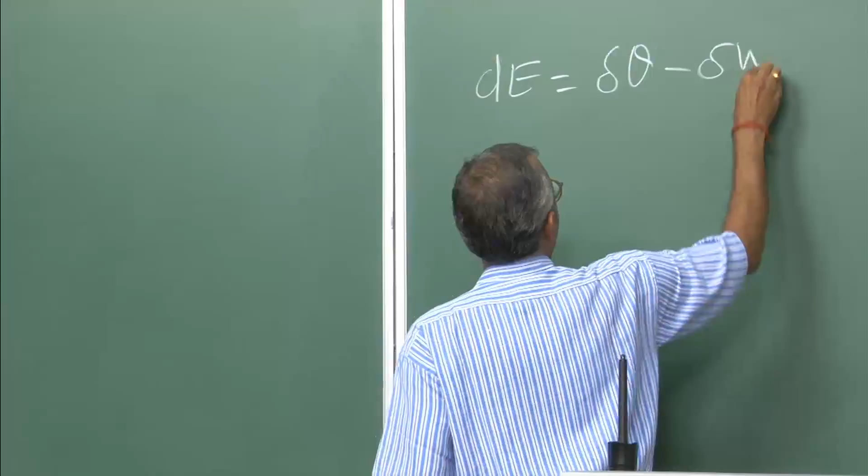Then after that we discuss how to apply the first law of thermodynamics for a control mass system, which is nothing but dE is equal to del Q minus del W. This is basically the first law of thermodynamics for a control mass system.

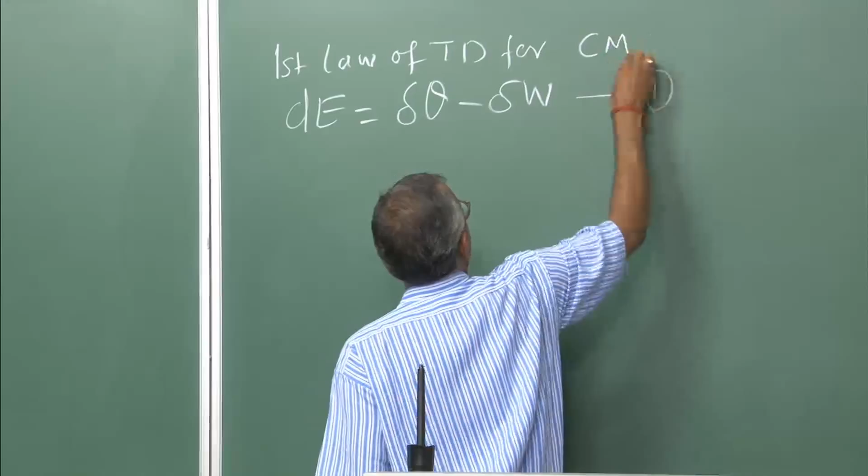If you look at this case, E is basically the total energy, which will consist of both microscopic and macroscopic forms of energy. The microscopic form of energy we always put in terms of internal energy, and for macroscopic form we are considering only 2 kinds: potential energy and kinetic energy. But besides this there are several other forms of energy as well. Keep in mind that energy is the property of the system, whereas heat interaction and work interaction are not properties of the system, rather considered to be energy in transit.

Then we derive an expression for the control volume system, which we will be using for analyzing the propulsive devices. Then we moved into the second law of thermodynamics.

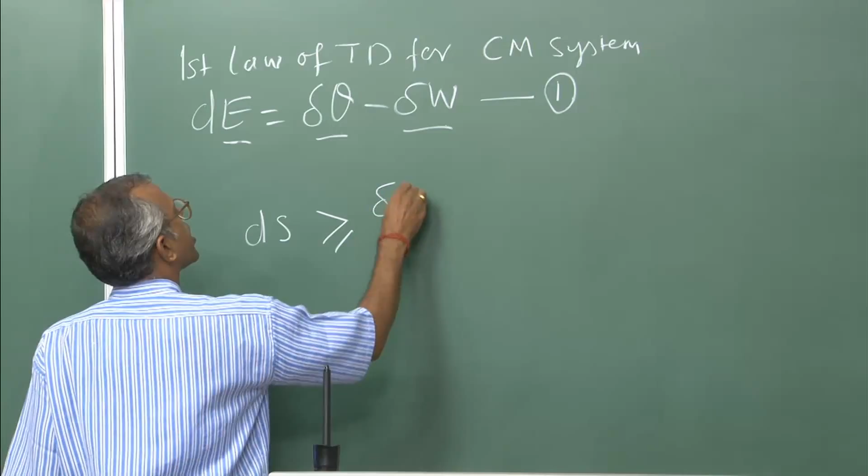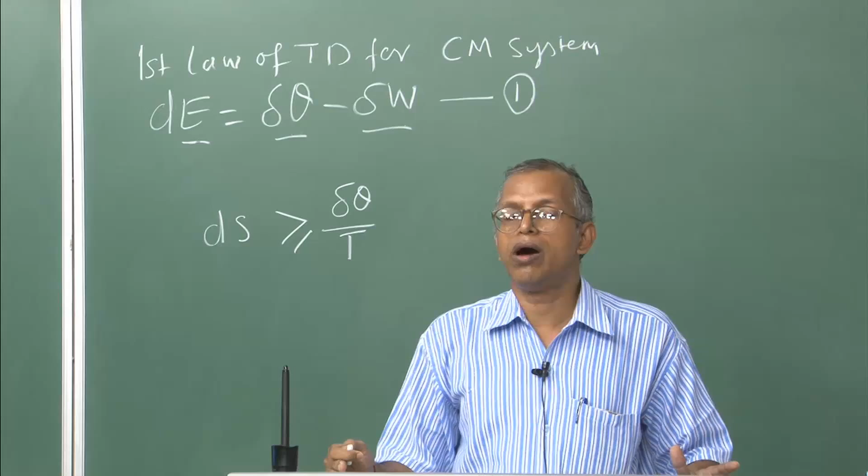We arrived at a terminology, that change in entropy is basically greater than or equal to del Q by T, which stems from the Clausius inequality. What is Clausius inequality? If you recall, it states that whenever a system undergoes a cyclic change, however complex the cycle may be, the heat interaction or the algebraic sum of the heat interaction divided by the respective temperature at absolute, or the Kelvin scale...

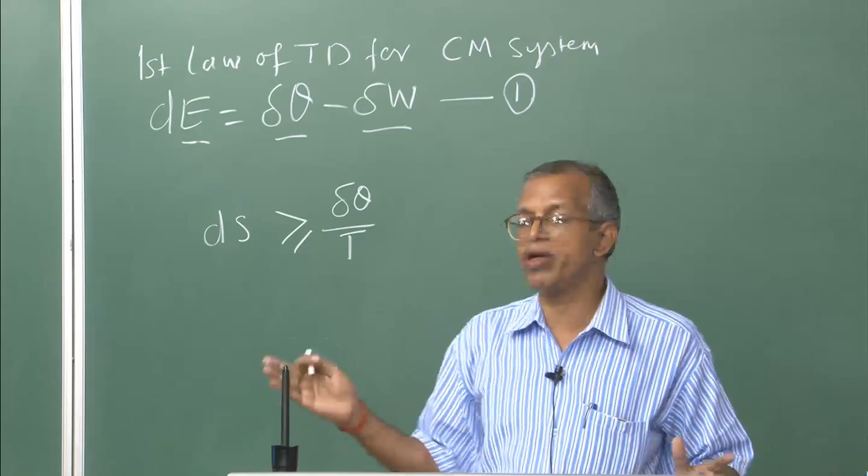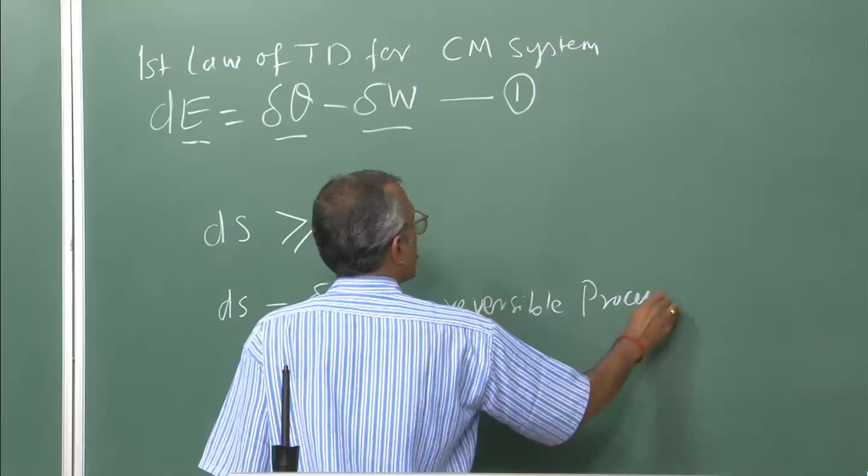...is less than or equal to 0. From that we have derived that ds is equal to del q by T for a reversible process, whereas ds is greater than del q by T for an irreversible process.

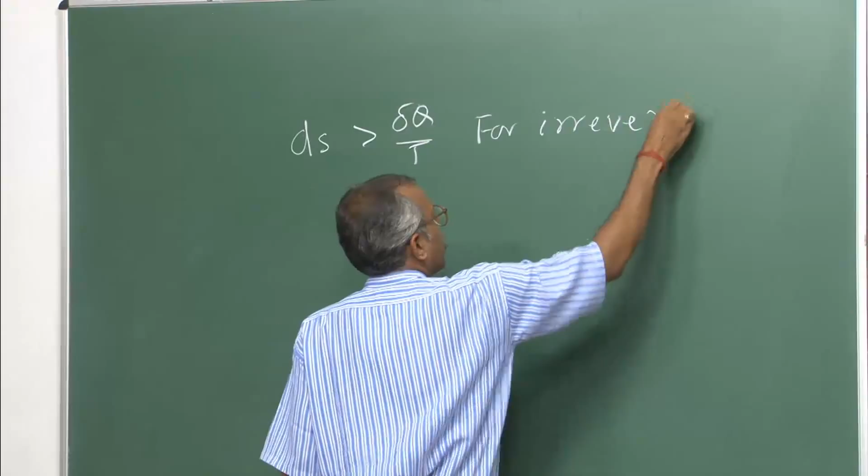Now, this equation is basically valid for a control mass system. For control volume systems, we have derived, or rather stated, an equation which I urge you people to derive yourself, and if you find difficulties, then we will look at it.

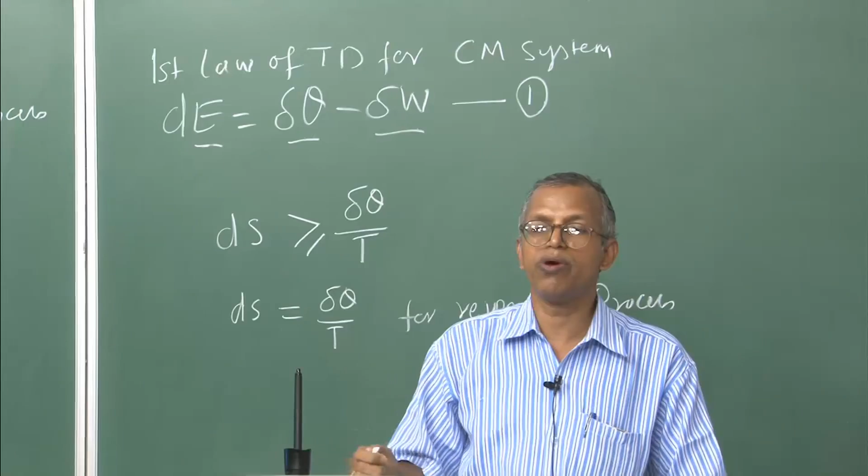Today what we will be doing, we will be looking at the fluid mechanics part, and look at how it can be helpful and what are the concepts involved in fluid mechanics, and how we can use it for analyzing the propulsive devices.

Let me ask a very simple question: what do you mean by fluid? Can anybody answer? A substance that has a tendency to flow. Okay, you are saying that which can flow, right? That you call it as a fluid.

But before answering this question, let us look at the kinds of matter we are having. The matter, if you look at, is basically having a solid, and in case of solid these are molecules which are quite compact, and there is intermolecular forces which will be there, and it is in a particular order. We know that in case of solid.

In case of liquid, what will be happening? These molecules are a little apart and they can move the way it can be, or it will be taking the shape of the container it is placed in.

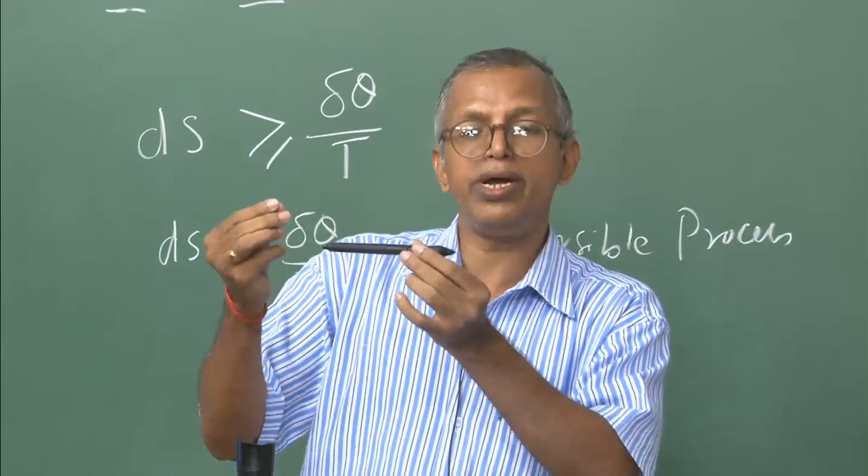Whereas the gas will be moving very freely compared to the liquid and the solid. Now, let us say I apply a force to a solid, for example if I take this pen and apply a force, what happens to the molecules? It will try to resist the force, however some deformation may take place. If I remove this force, the deformation will come back to the original one. That means the deformation, which we call strain, is the change in length per unit length, and the stress experienced by the molecules of this solid object is proportional to the strain, within the elastic regime.

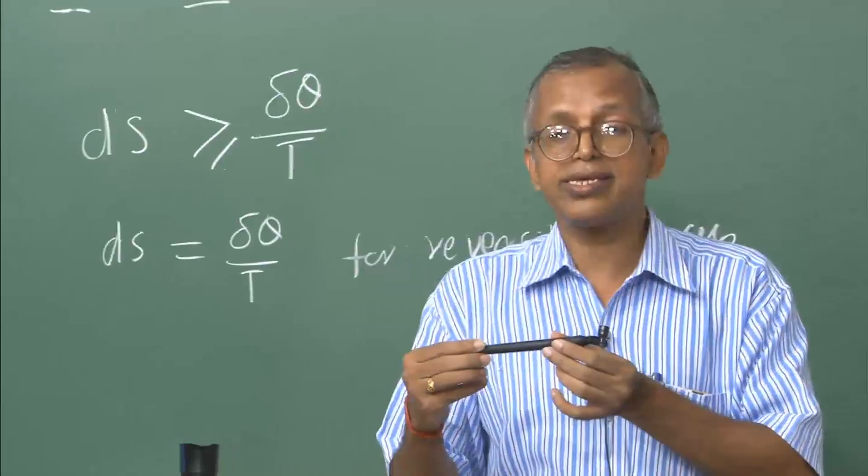Whereas if I apply the same force to a liquid, what will happen? It will continuously deform, so we can't really say it has a fixed strain. A stress will be experienced by the fluid molecules, but it is not proportional to the strain, rather it is proportional to the rate of strain. Similarly, this happens for a gas.

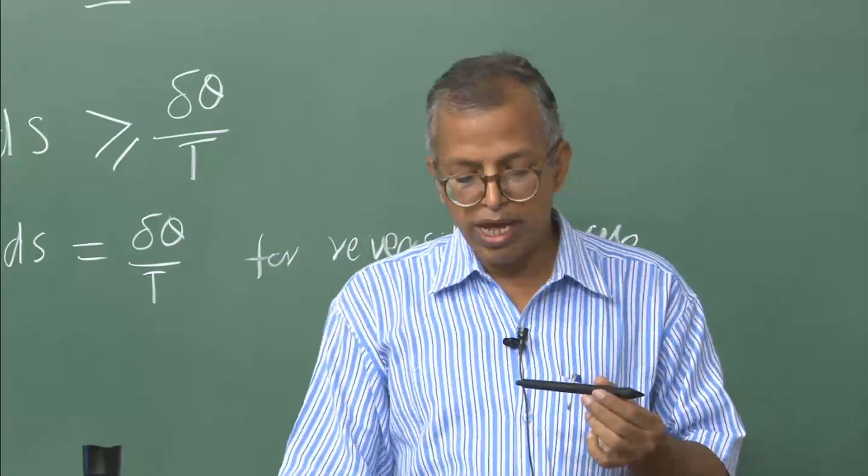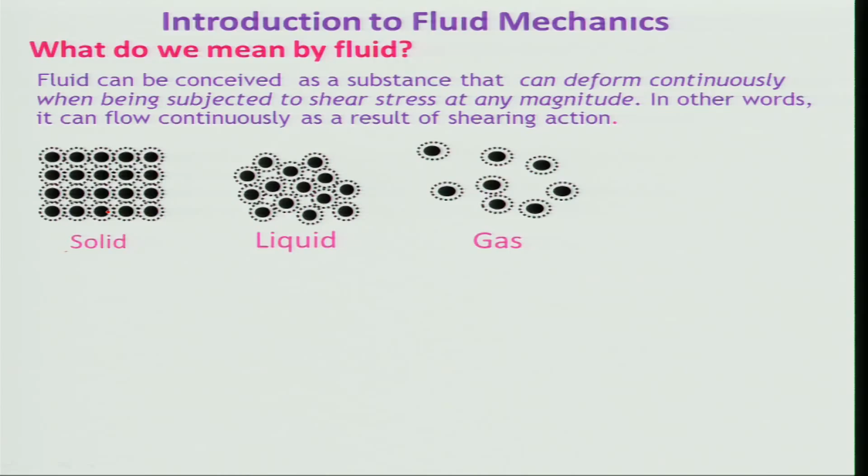So we can define a fluid as a substance that deforms continuously when subjected to a shear stress of any magnitude. In other words, it can flow continuously as a result of shearing action — that is what we call a fluid. This means the fluid has more freedom to move around, and whenever it is moving, it is subjected to a force and can move from one place to another, interacting with other molecules.

The molecules in the fluid interact with each other, and when they interact, there is a change in momentum due to collisions. There will also be a change in temperature depending on whether energy interaction is taking place.

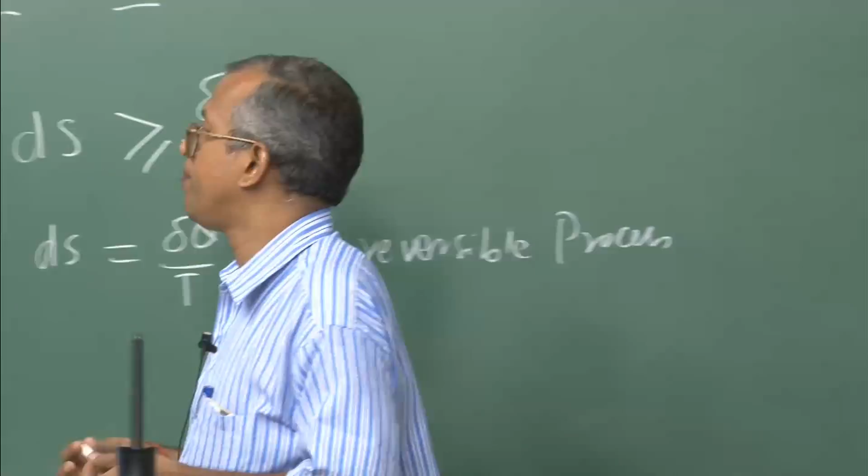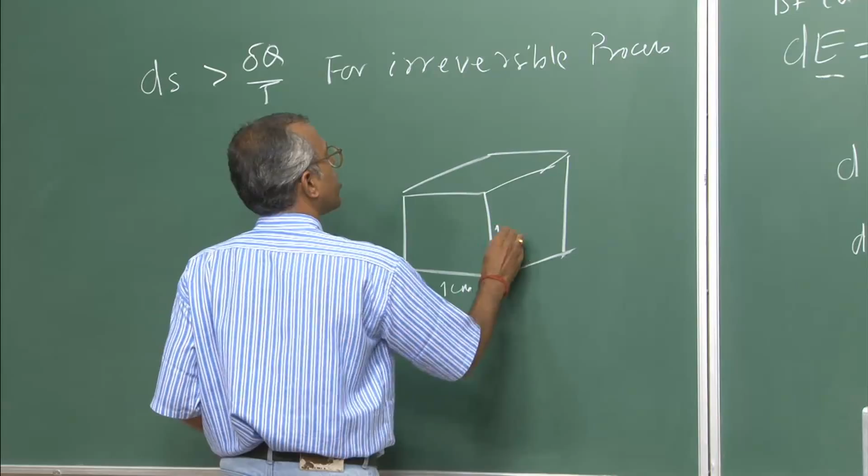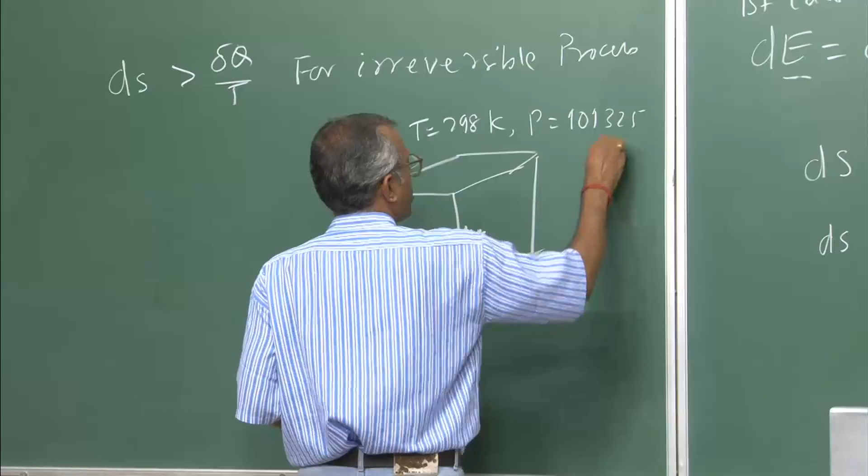Now, if there is a fluid moving around and I want to know the summation effect of this momentum, for example if I take a small cube of 1 centimeter by 1 centimeter, at ambient temperature and pressure — temperature of 298 Kelvin and pressure of 101,325 Pascal — what will be the number of molecules inside it?

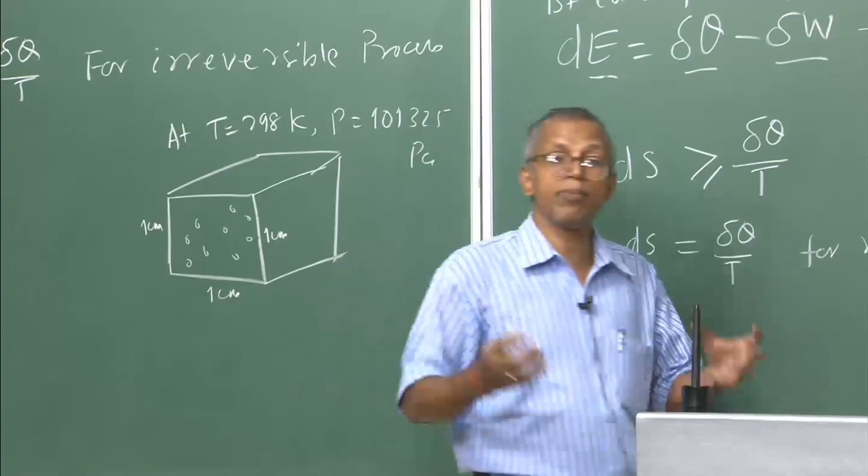Can anybody tell me what the number of molecules will be? That will be around 10 power 23, 6.023 times 10 power 23 — a large number of molecules which will be colliding with each other.

If I take that and put a kind of sensor to look at what is happening to the molecules — a surface sensor whose area is around 10 mm or maybe 5 mm — and consider a pipe through which flow is taking place, with the pipe diameter around 10 centimeters, I will put a probe of 1 centimeter or 10 mm. So what happens to the pressure if I want to measure it? The molecules will be bombarding the surface on which it impacts, and then you sense it and get a reading.

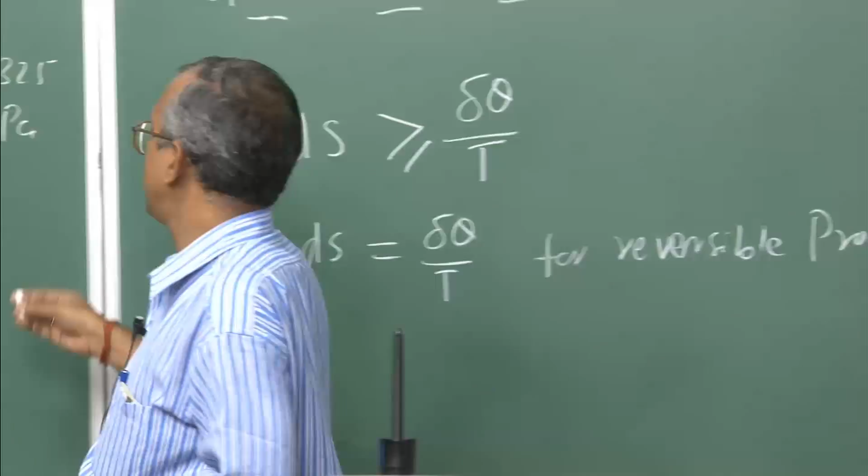But that effect is what we call a macroscopic effect. However, if I am interested in looking at each molecule and how it is interacting, if I take 10 power 23 number of molecules, that means I would have to track each molecule's mass, its individual velocity, how it is imparting force as it collides, and the number of equations would be very high — it would be quite difficult.

Naturally we need not worry about it at that level, but how do we handle it? We can handle it in a statistical sense, because it is an enormous number of equations one can think of.

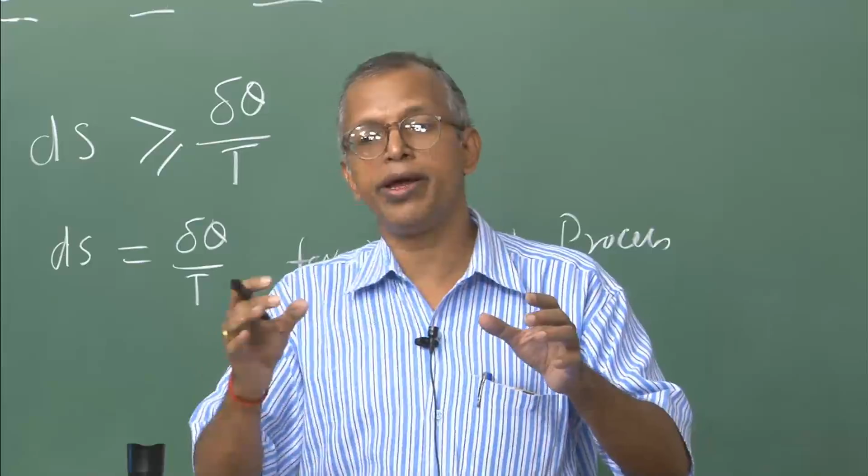Now the other thing that comes in is scale. For example, if I'm considering a pipe in which flow is taking place, something like 10 centimeters, and the fluid is flowing at certain velocities, the molecules will be colliding and the mean free path will be very small compared to the scale. For example, if it's something like 1 mm in a 10 centimeter diameter pipe, it will be much smaller, and several collisions will take place within that 10 centimeter diameter. So then we can call it a continuum flow.

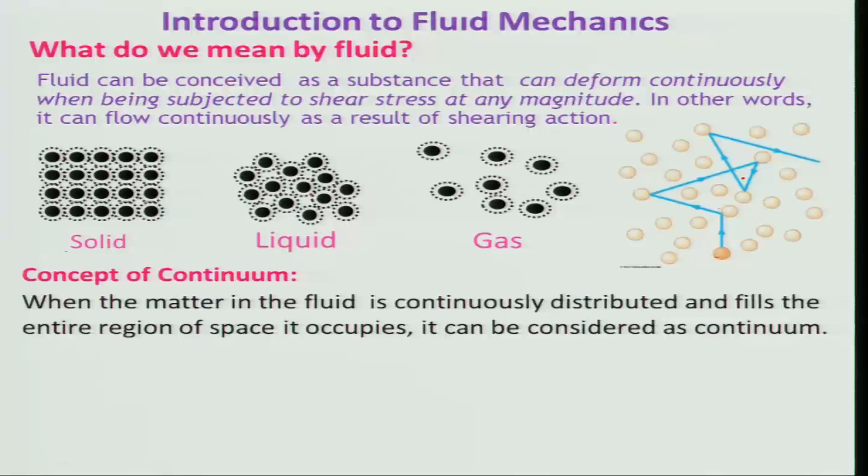So we define a number which is the ratio of mean free path to the characteristic length scale, known as the Knudsen number. If the Knudsen number is less than 1%, we call it a continuum flow - that means we can look at it macroscopically and consider the properties as continuum flow. But if the Knudsen number is between 1% and 10%, we call it a slip flow.

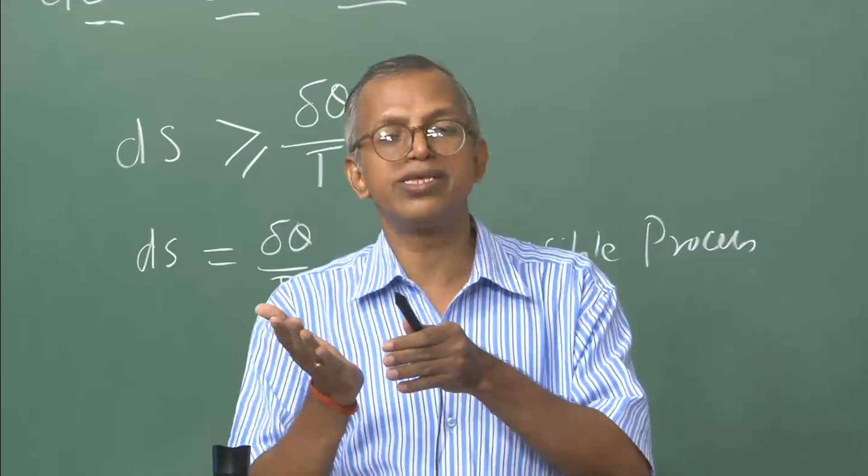That means the molecules will be slipping - from where? It will slip whenever it comes onto a solid surface. In our case, in continuum flow, if there's a flat plate with fluid on it, the fluid will be sticking to the solid surface.

That means there will be a no-slip condition at the surface of the solid over which it is flowing. In the slip flow it will be quite difficult to handle, and when the Knudsen number is between 10% and 1, we call it a transition flow, and when the Knudsen number is greater than 1, this is known as a free molecular flow. That means the molecules will be free, separate from each other.

If you look at our applications of aerospace propulsion, we will be mostly dealing with the continuum flow. But when your spacecraft goes to deep space, can we really apply it? You cannot really apply it. However, if I look at my system, a rocket engine or something, then I can say it is a continuum, but outside it will be difficult. And it is quite a hot topic even today, because it is still evolving.

There is a very beautiful book written by G. A. Bird, known as Molecular Gas Dynamics. If you are interested, you can look at that book. Keep in mind that this continuum flow which we will be dealing with will be governed by a number, the Knudsen number, which must be less than 1% or 0.01. Can it be related to certain properties? Are any of you aware of that?

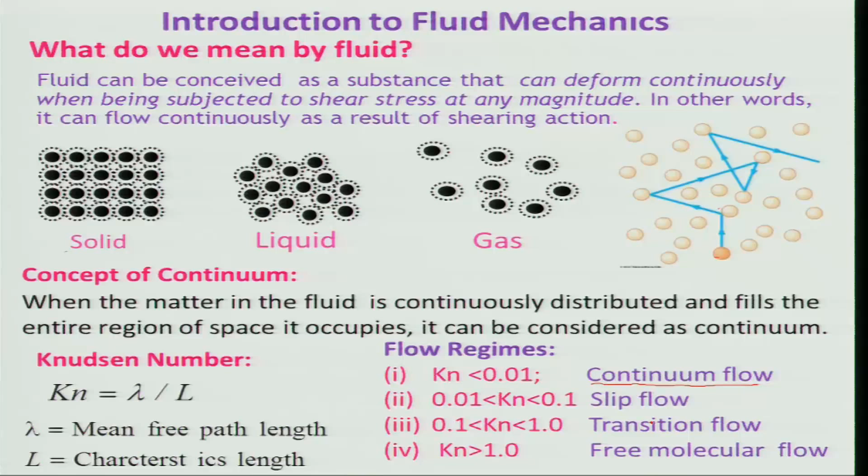It will be related to 2, rather 3, non-dimensional variables, which I will leave for you to look at. Maybe as we go along, we will discuss it. And that can be derived by using the molecular theory of gases. So, let us look at how to classify fluid flows, because we will be more interested in fluid flow in these aerospace applications. How will this fluid flow be helpful? It can be helpful in 2 ways.

One way: whenever fluid is flowing through a duct or over a surface, a certain force will be applied, or a certain force or thrust will be generated. Besides this, whenever we are converting some energy into thrust force, we need to pass through mixing. That means some energy conversion and chemical reaction will be taking place, as we are using fuel as an energy source, and then some diffusion and mixing will take place. So, fluid flow is very important for our aerospace applications.

For example, I can have motion in a pedal cycle, but do we really need any fluid there? We do not; we are applying the force mechanically. But if I want to travel in the air, or make an object move in the water, then naturally fluid flow comes into the picture, and if you want to go at a higher speed, then naturally we will have to use fluid devices.

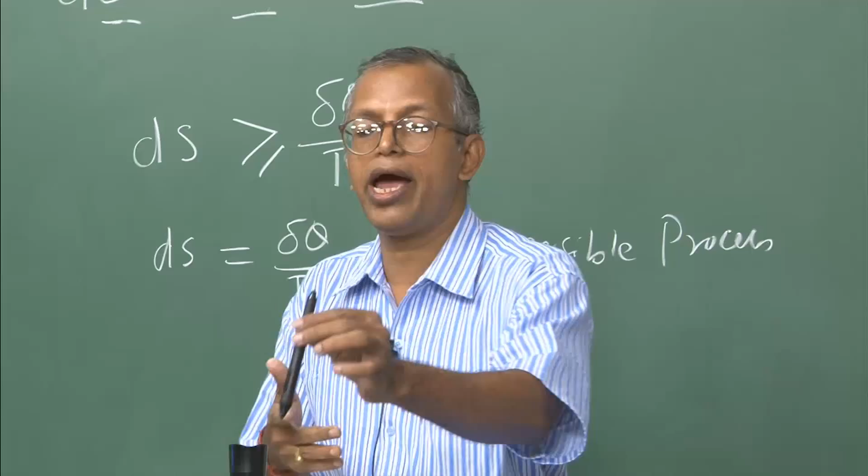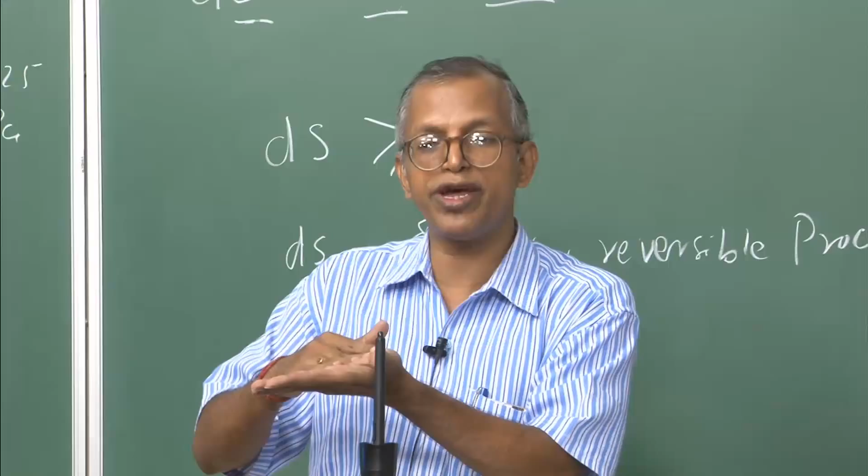For example, let us say this is a solid surface and the fluid is going over it. What will happen? The fluid will be retarded at the surface of the plate on which it is moving. And friction, we all experience it. For example, if I am rubbing this surface, what am I getting? I get friction, and it is resisting.

So, generally a flow is considered viscous only when its frictional effects are quite significant in comparison to the inertia. Besides this, there will be some thermal conduction, meaning some heat transfer will be taking place, and also mass diffusion, like in your combustors, where fuel and air have to be mixed and then react, transferring chemical energy into kinetic energy and other forms.

So, there also we call it as a viscous flow, although in fluid mechanics people do not talk about it generally. And beside this, whenever its viscous effect is negligibly small, then we can call it an inviscid flow, where the viscous forces can be neglected as compared to the inertial or the pressure force.

And keep in mind that we will be using this inviscid flow analysis for our propulsive devices, right, because the boundary layer, which we will be discussing a little later on, will be very, very small.

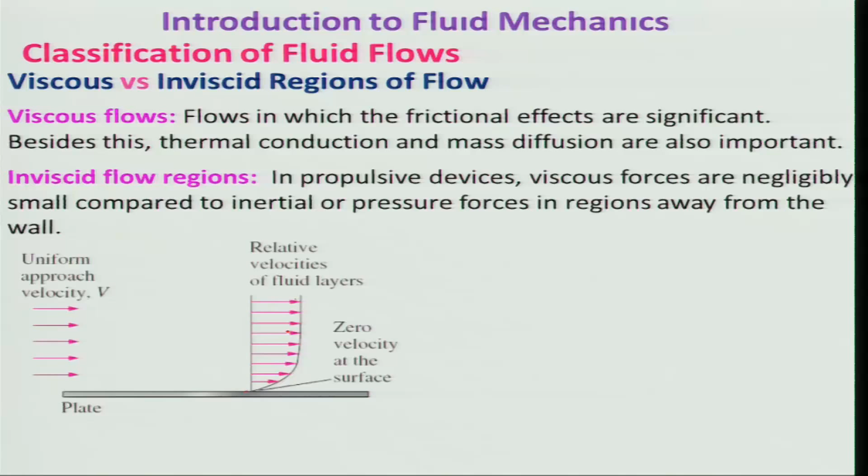Let us look at a visual picture. You can see this is the velocity profile, where the viscous flow region is very, very small, whereas the inviscid flow region is quite large. Therefore, we can apply inviscid analysis for this region, whereas whenever we want to find out the drag, we need to consider this viscous region for analysis.

And if you look at the shear stress, we can evaluate it at this region. Taking this point here, the shear stress will be proportional to the change in velocity with respect to the normal direction n, dV/dn. When it is proportional to the rate of strain, tau can be expressed as tau equals mu dV/dn, where mu is the dynamic viscosity coefficient.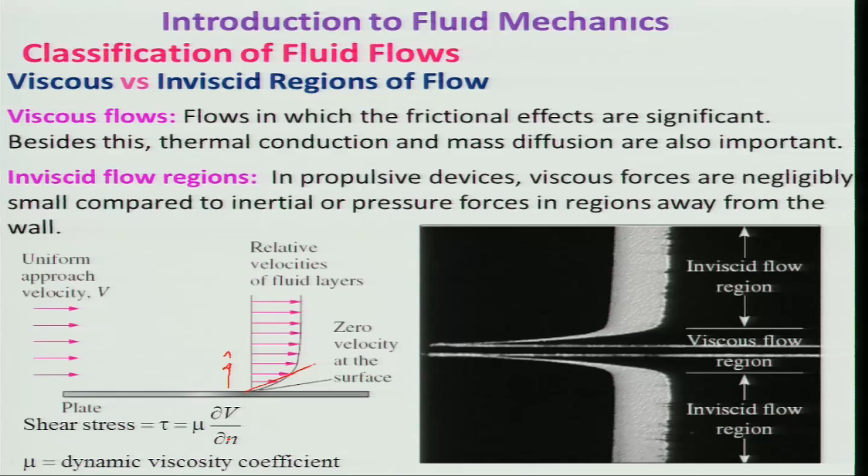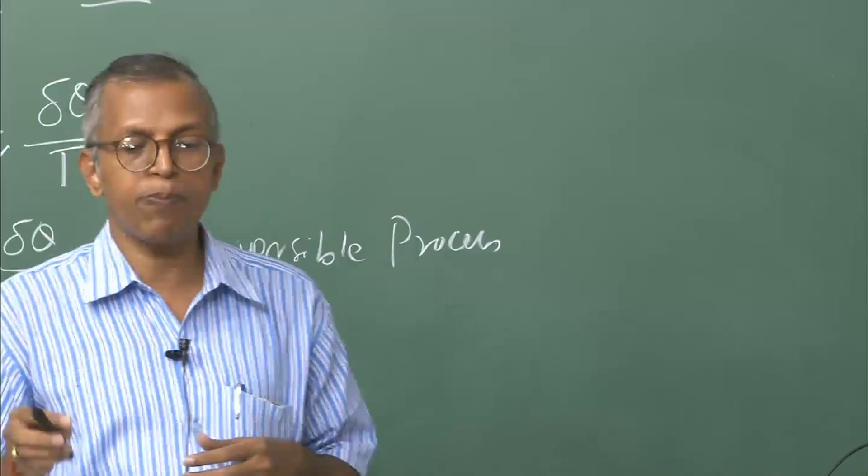Keep in mind that this will be valid for Newtonian fluid, right. That means the shear stress is proportional to the rate of strain. However, there will be some other fluids, like lubricating oil, or even paste, which will not follow this Newtonian concept of fluid. But in this course, we will be restricting ourselves to Newtonian fluid only, right.

Let us look at laminar versus turbulent flow. If I ask a question, what do you mean by laminar? The name indicates that it will be layer by layer, and the fluid will be moving in a quite smooth and orderly manner. For example, in this flow over a flat plate, you can see the fluid layers moving layer by layer without intermingling with each other.

For example, in an army, the soldiers will be moving in a very orderly manner. That means they are quite disciplined in nature. Some of you might have taken NCC, you will be going in a row. So that you can call laminar, and in contrast, turbulent flow will be quite disordered, intermingling with each other. As a result, the velocity, temperature or pressure will be changing with respect to time.

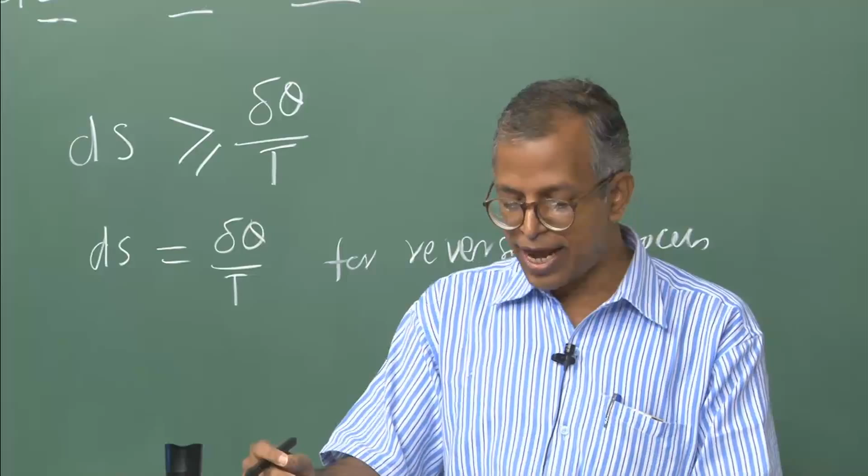And if you look at the traffic in Kanpur, it will be more towards turbulent. Sometimes I feel it is not turbulent, rather it will be transition, an in-between kind of region.

So, in order to talk about laminar and turbulent, we need to define a number known as the Reynolds number, which is a ratio of inertia force divided by viscous force, in this case rho V x divided by mu, where rho is the density, V is the fluid velocity and x is the characteristic distance. In flow over a flat plate, x is the length measured from the leading edge, and mu is the viscosity. The Reynolds number will decide whether the flow is laminar or turbulent.

In case of a flat plate, we know that the critical Reynolds number will be around 5 × 10^5, whereas for a pipe flow the critical Reynolds number will be around 2300. And keep in mind, this is the non-dimensional number which dictates whether the flow is laminar or turbulent, and the transition flow is between the laminar and turbulent.

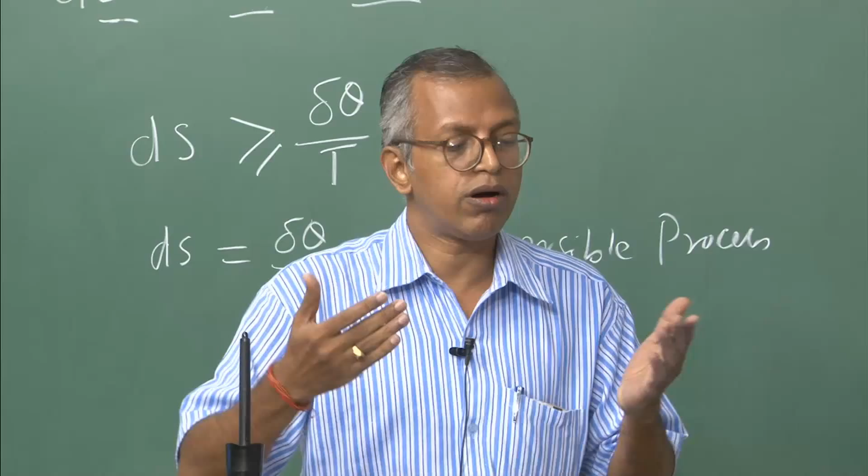I always like to give an example. Laminar means, when you look at your mind, particularly when you are a small baby, you do not really bother about other things; it will be in the laminar regime. When you are a youth, your mind will be vacillating and more confused here and there; then it will be like a transition, because it is very difficult to predict. Similarly, transition flow is quite difficult to predict. Therefore, a lot of research is going on today to understand the transition behavior of the flow. And similarly, turbulent will be the later stage one can think of.

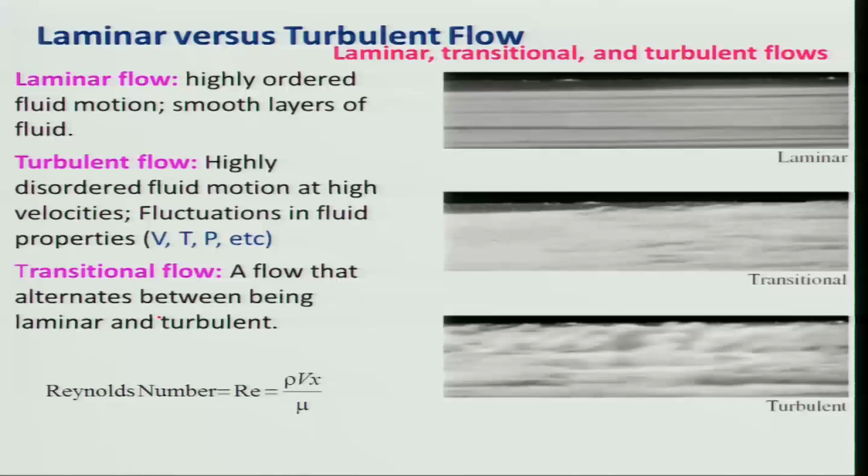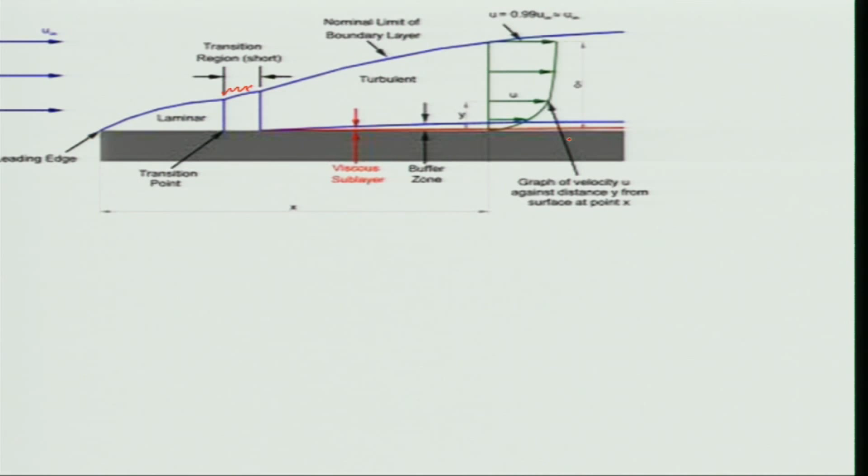And this boundary layer will be growing, which is defined where the velocity is 99% of the free stream velocity, because the velocity will be increasing asymptotically. So, at that point we define it, and keep in mind this is an ad hoc way of doing it; practically we have taken 99% of the free stream velocity. So, this is the boundary layer sticking to the solid surface, and there might be a case where the boundary layer will be separated from the solid surface, and that depends on the type of surface, and in other words it will be dependent on what?

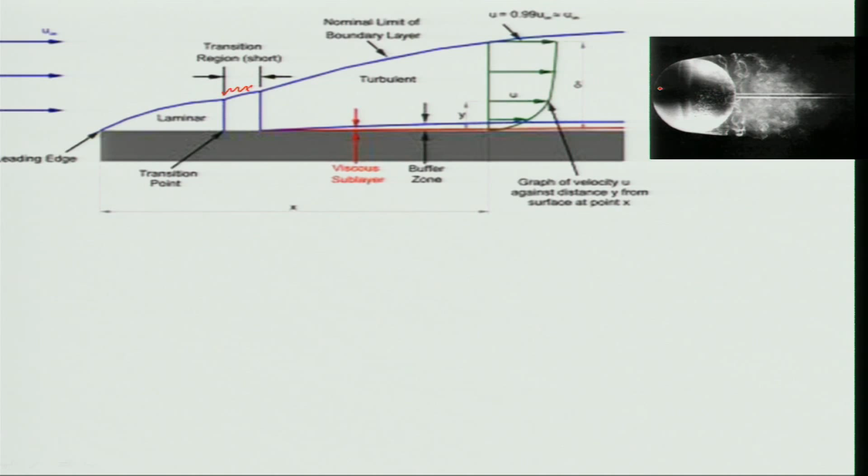Pressure gradient. So, let us consider a ball here, and in this case fluid is coming, which is not shown here. The fluid is almost laminar, and then it gets separated, recirculated and mingled, and the flow becomes turbulent in the wake region. This is known as the wake region. And this flow separation will be dependent on whether the flow is laminar or turbulent. This is a simple ball which I have taken.

Now, as I told earlier, in this case the velocity profile is parabolic in nature, and when the pressure gradient increases, suppose I have an adverse pressure gradient downstream, what will happen? The velocity profile will be like that. That means the incoming flow will be retarded more in this region as compared to this, because of the adverse pressure gradient. Something is not allowing the fluid molecules to move forward. So, then there will be an inflection point where the gradient is almost 0 along the y direction. This is my y direction, this is my x direction.

Therefore, as the pressure gradient increases further, the fluid will be moving in the opposite direction, that is, the negative x direction. Therefore, the flow will be separated. That means flow separation occurs whenever there is an adverse pressure gradient in the flow, and that may be due to the shape or some other back pressure, depending on the situation.

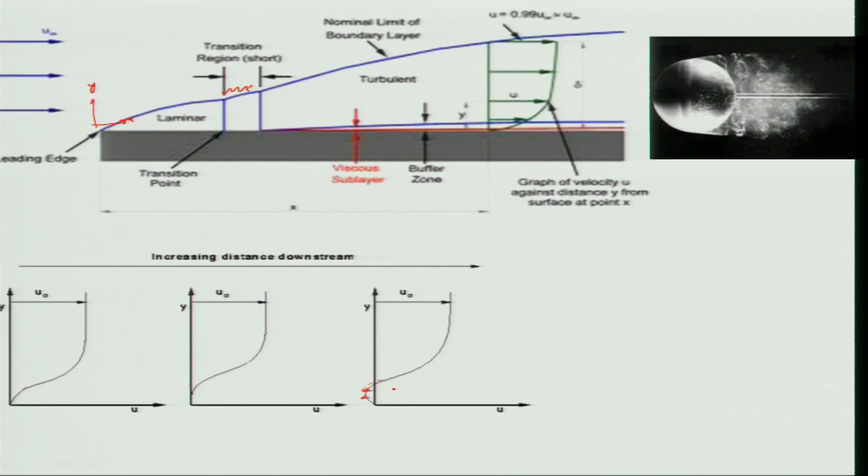Now, laminar flow will cause more separation on a body in comparison to turbulent flow. I will take one example. This is a smooth sphere like a ball, and the flow is laminar here, and of course the flow becomes separated, having a thick wake region.

But if I make this ball with dimples like a golf ball, intentionally made with dimples, these kinds of indentations, then what happens is the flow undergoes transition and becomes turbulent. However, the separation occurs further downstream on the ball as compared to here, where it occurs very early. As a result, the wake region is very thin as compared to the thick one here.

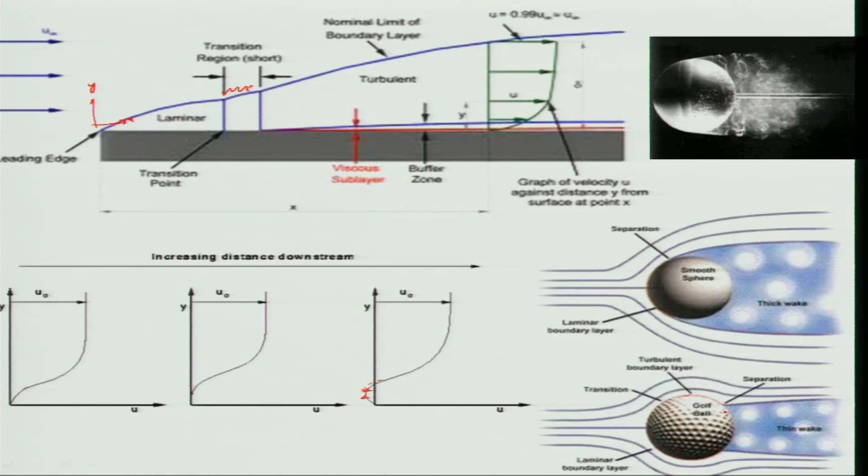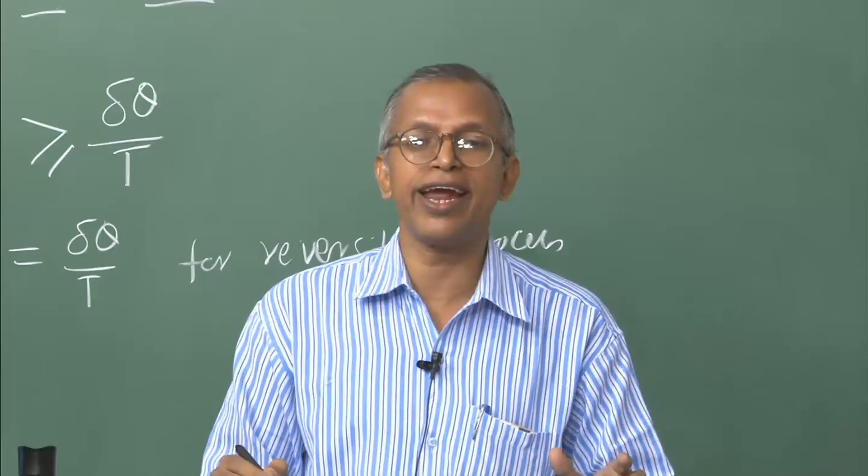So, what does it indicate? It indicates that turbulence retards the separation of the flow. People always want to avoid turbulence in some situations, but here it is advantageous. That means whatever is a negative thing can be converted into a potential tool for achieving something, which is very important in life as well. So, we need to understand ourselves and find ways and means of using those negative aspects to get a

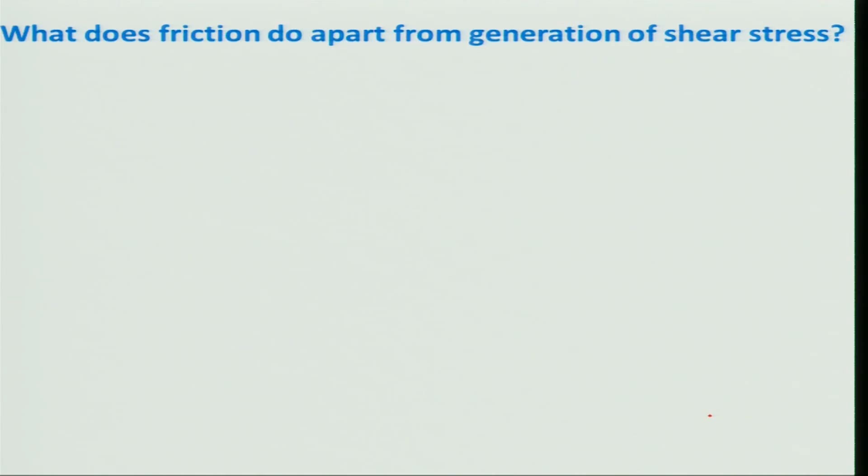positive thing. So, the question arises: we are discussing viscous or inviscid fluid, then laminar and turbulent, and what are we doing? We are basically looking at the friction effect, and we have seen that it generates a shear stress, and then flow separation and other things come in. But is there anything else it can do? In other words, what does friction do apart from generating shear stress? Can anybody tell me?

It will be generating heat, right. Under what condition can it generate heat? Relative motion. Why will it generate heat whenever there is relative motion? What is the reason? Momentum. So, momentum means there will be a force. So, how will it come into the picture? Right. So, if rubbing of the surface is taking place, there will be some kind of dissipation, which we will be discussing. Besides this, what else can it do?

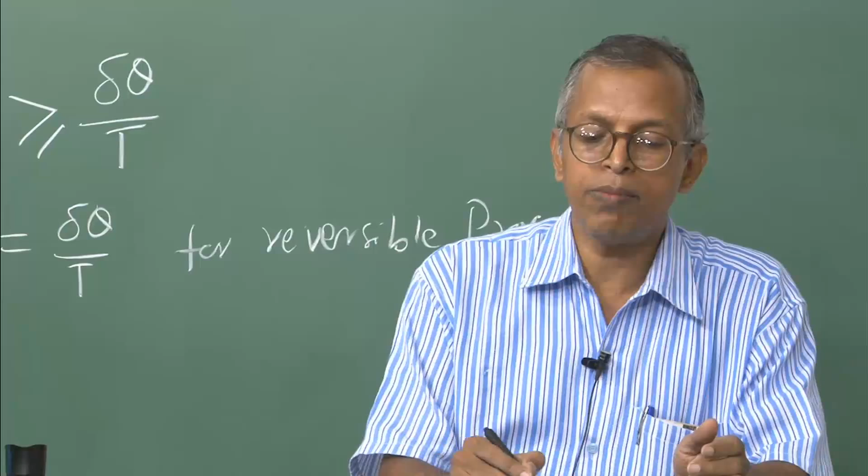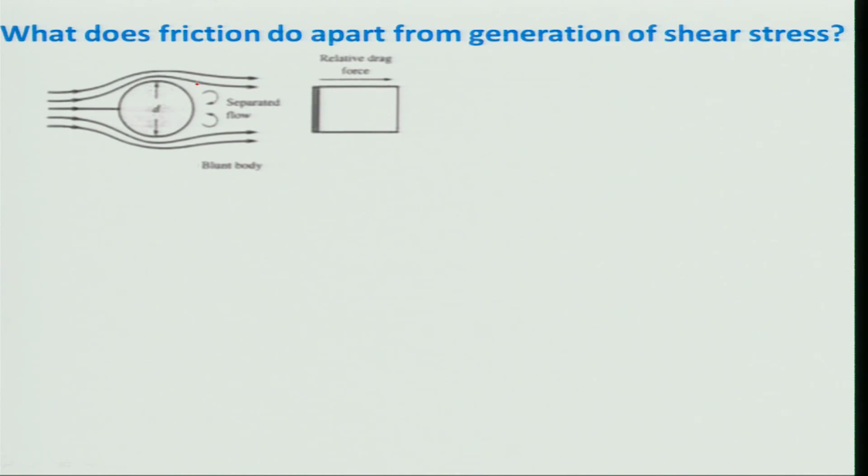Let us consider the flow separation in the ball we are discussing here. Fluid is coming over and then it gets separated at a certain region; this is separated flow. And whenever this flow is separated, what happens to the pressure in the wake region? It is reduced, right. And when it reduces, what will happen? It will try to drag this ball along with the fluid more, apart from the dragging due to friction. So, it will be adding to that, and I may want to reduce this drag force.

That means, dragging can occur due to two things. One is skin friction due to viscosity, and the other is due to the separation of the flow; there will be a pressure drag also. But if I want to reduce the drag, what will I do? I will make the body streamlined. That means the shape of the body is such that the flow glides over without much tendency to separate from the solid surface. However, in this case, you are getting drag due to skin friction and also pressure drag.

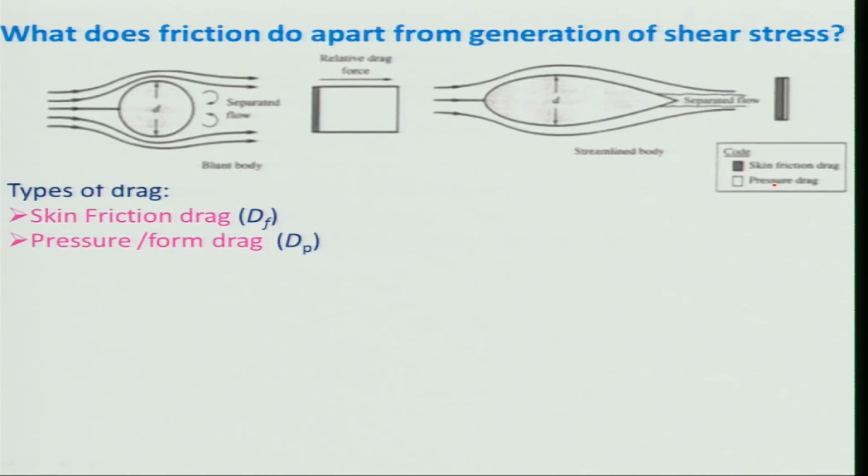So, to summarize, the types of drag are skin friction drag and pressure or form drag. So, the total drag will be skin friction plus form drag. Keep in mind that in aerospace we always want to design a surface like an airfoil, basically a streamlined body, to reduce the pressure drag.

But is there any place where we will use a bluff body? Here I have written it as a blunt body, also known as a bluff body, which is a non-streamlined body. Can we really use it somewhere? Space shuttle. A re-entry vehicle, you would always use a blunt body, right. Of course, that depends upon the kind of wave and other interactions. But what I am saying is we can use a non-streamlined body in some places where it will be beneficial for achieving certain things.

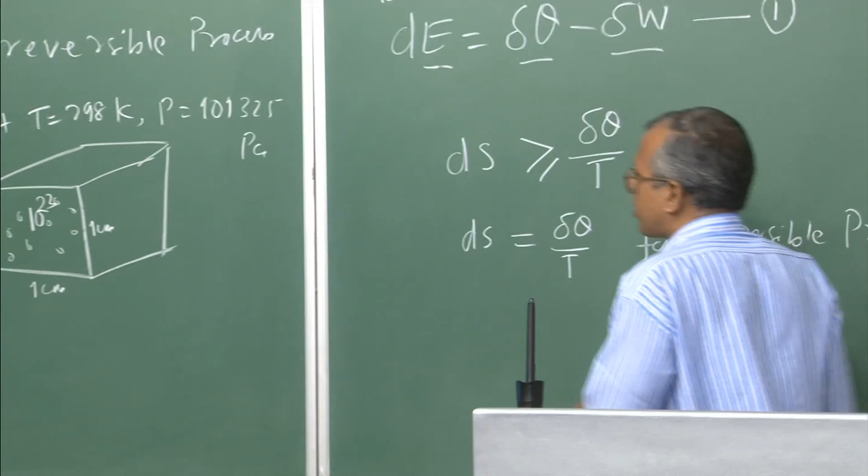For example, a bluff body is non-streamlined, like putting a circular body or a flat plate in the flow. If I take a bluff body in a flow, just a flat plate, let us say the flow is coming this way and I put a body like this, then what will happen?

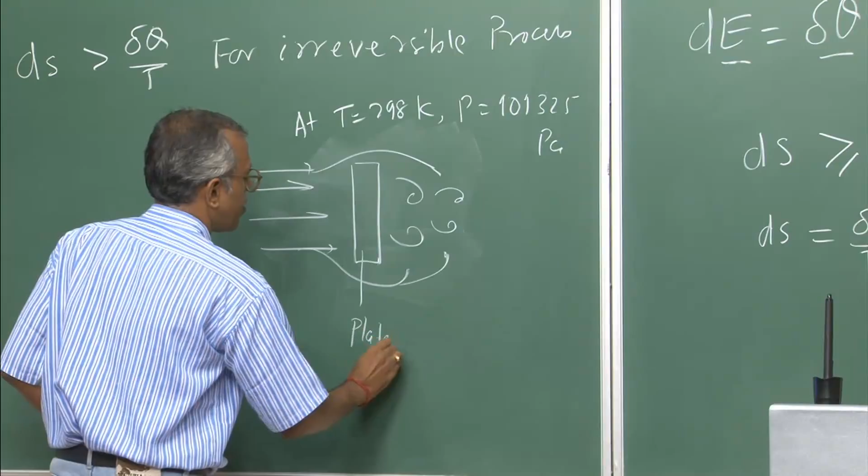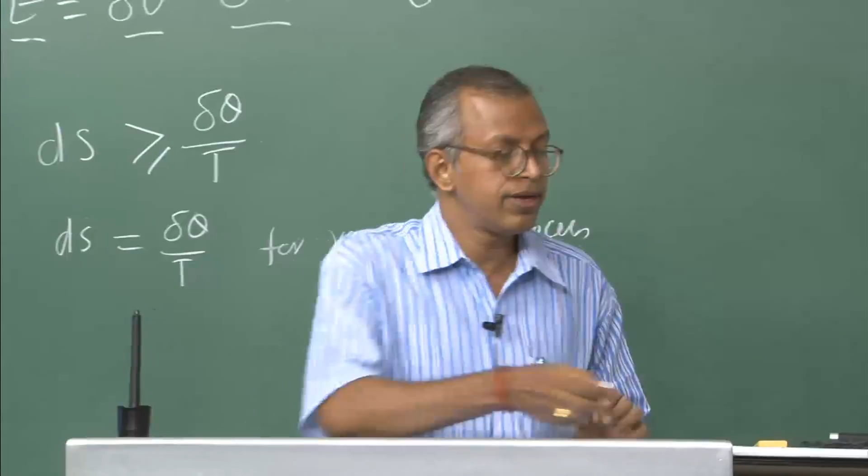There will be a recirculation region, and this is a vertical plate, right. Can I use this somewhere to achieve something in my propulsive devices? We will see that we will be using this in the combustor for getting better fuel-air mixing, and also stabilizing the flame.

So, whichever is the problem in some place, it can be used as a solution to overcome the problem. That is a very important point one should look at, and we will be using these concepts while talking about the propulsive devices. And as we have already discussed, some of you told that whenever a vehicle or body is moving, or fluid is moving at a high speed over a body, it can be vice versa, then what will happen?

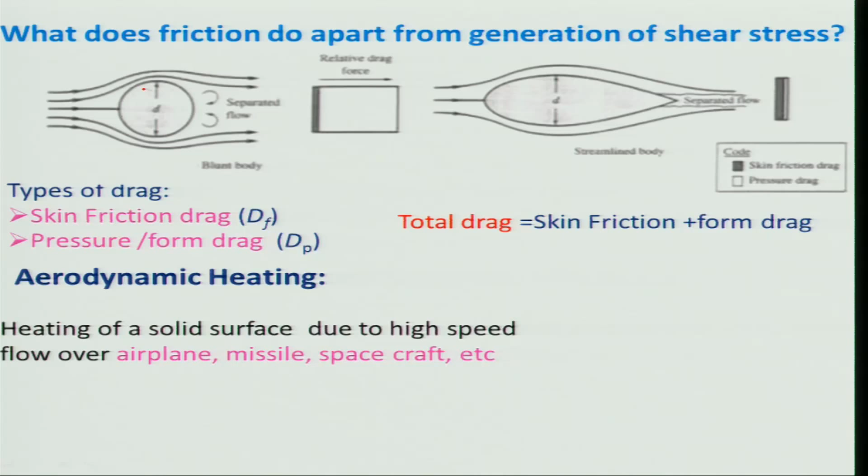There will be a lot of kinetic energy which will be converted into internal energy. That means aerodynamic heating, which will be experienced by the solid surface due to high speed flow over an airplane or missile or a spacecraft, to give some examples, or any other surface, and then that heating has to be taken care of, otherwise your vehicle will be in trouble.

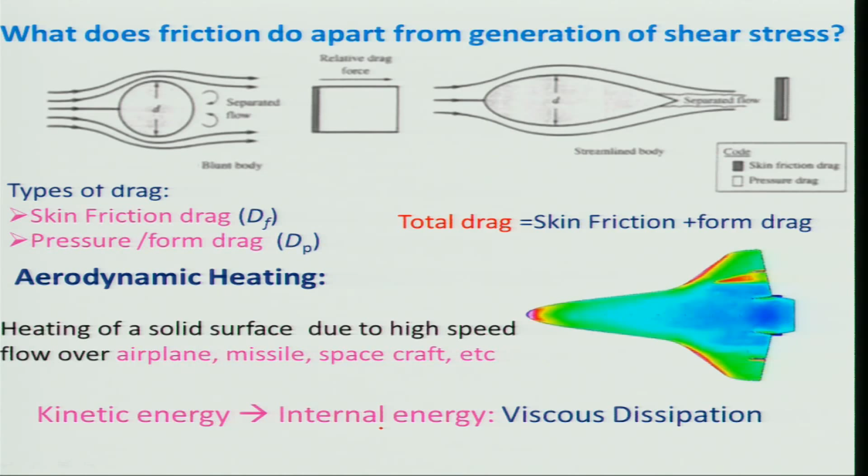And a similar situation may occur in your gas turbine application, particularly turbomachinery, when you are going for high speed flow over turbine blades. So, therefore, one has to worry about this aerodynamic heating. Keep in mind that kinetic energy in this case is converted to internal energy, and as a result there will be an increase in temperature, which is known as viscous dissipation, because it will be dissipated, you cannot get it back. And one has to also take care of this when designing any devices.

So, now we have talked about internal versus external flows, and we need to understand what we mean by internal flows and external flow. The flow of an unbounded fluid over a surface, like a flow over a flat plate, flow over an aerofoil, flow over an aircraft or a missile, all those will be external flow, right. And the flow in a pipe or a duct, for example a nozzle, air intake in turbomachines, will be internal flow, right.

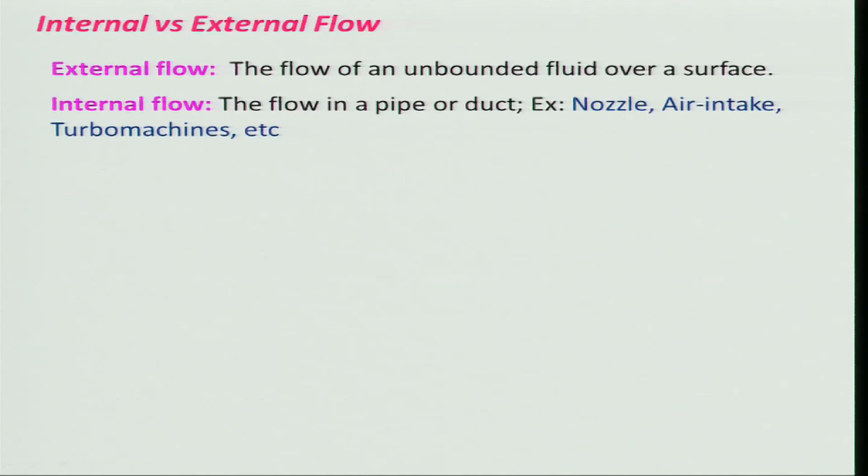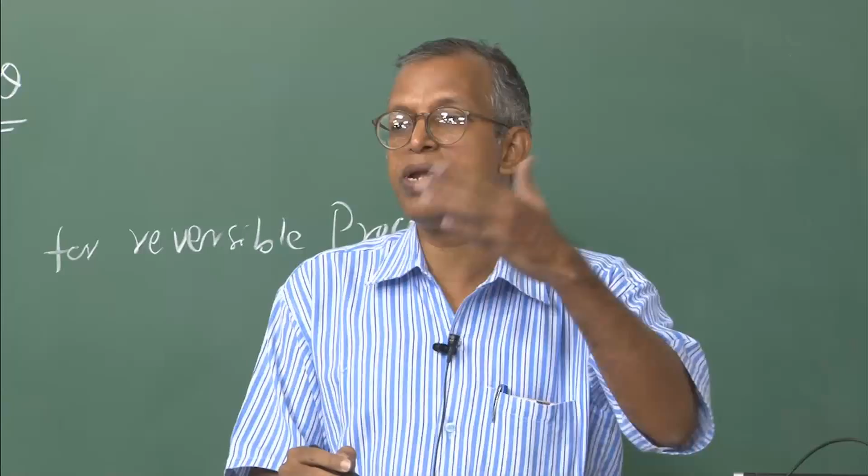However, in the case of a turbomachine, which I have shown, having rows of blades, the flow here is basically internal flow. However, on the surface of it we can call it external flow, if the blades are far away from each other; otherwise we will call it internal flow, right. Whereas if I take a wind turbine, which is also another kind of turbomachine, then naturally the flow will be external in nature.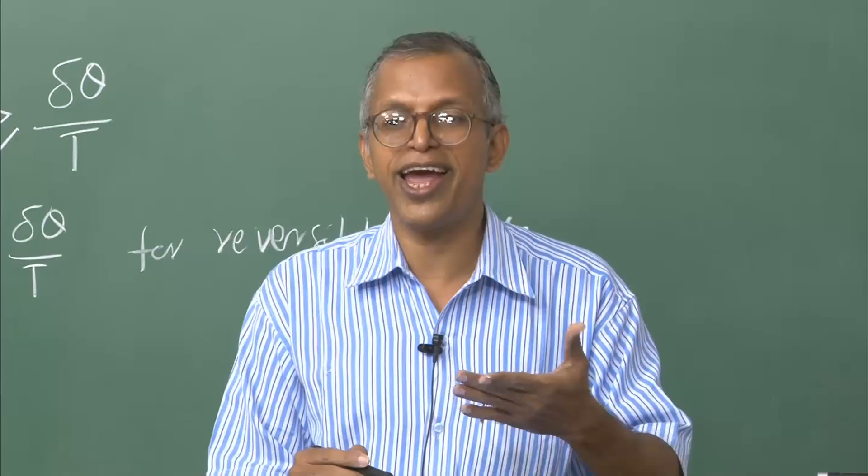You cannot say it is exactly 5; if it is 4.9 or maybe 5.1 on some average, you can say it is a steady flow, which is likely to occur provided you keep the flow the same in a continuous manner. You may ask when it will occur: if my engine is on the test bed and there is a nozzle through which flow is taking place during the hour of operation, it will remain constant provided I am keeping it constant. If I throttle it or vary it, then naturally it will be different.

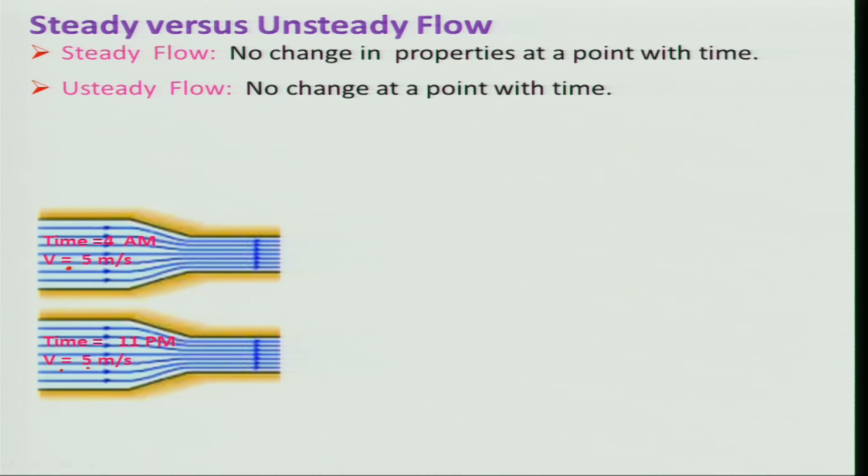Whereas in unsteady flow, there will be a change at a point with time, meaning the properties will be changing at a particular point in time. For example, if I look at a rotor or blades which is rotating, if you look at each point, it is moving, so it will be different. That means if I consider a point and look at properties like pressure, temperature, velocity, they will be changing. Of course in this case temperature will not be changing, but velocity and pressure will be changing with respect to time.

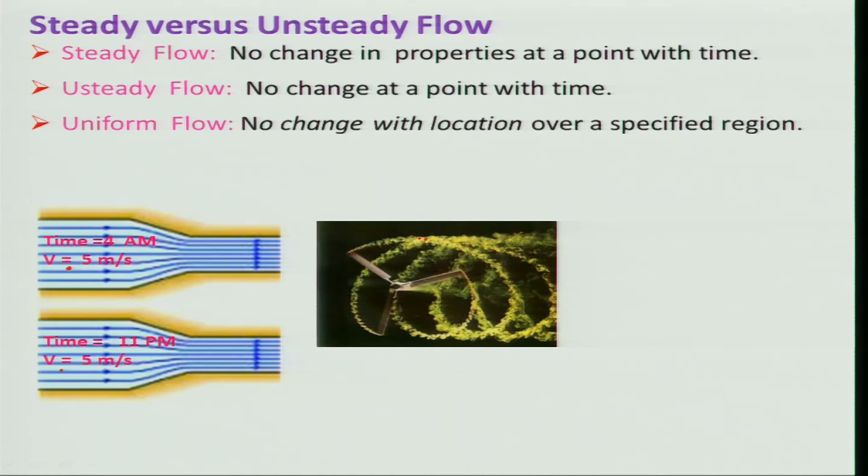So therefore we can call it an unsteady flow. There is also uniform flow, in which case the velocity or fluid properties will not be changing along a cross sectional area over a specified region. For example, in this case these are the places where I am keeping the fluid velocity uniform, as you can see from these streamlines.

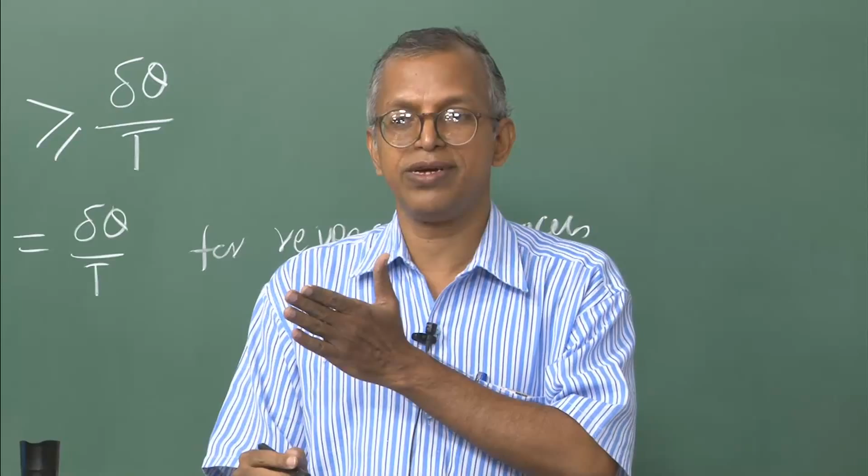Similarly, it is very important to identify where the flow is uniform. We do this particularly when deriving an expression for a thrust force, where we need to identify a uniform velocity, in order to simplify our analysis.

In this case, if we look at this car, the flow is taking place over it. If you look at these streamlines, which are curved, that indicates it is not uniform.

But if I go away from this, you will find the flow is uniform. Similarly, if I go away, into the wake region of the car, I will get uniform flow. And of course the inlet can have uniform flow, provided it is in a wind tunnel or somewhere. You cannot get uniform flow very exactly or accurately when it is moving, because there might be several other things, vehicles, coming.

So we need to understand this very important aspect, because we will be using it for simplifying analysis in several places.

There is also what is known as periodic flow, where unsteady flow will be there, but the flow oscillation will be varying about a steady mean. For example, if I keep the RPM of the blade constant and look at a particular thing, I will find that as the RPM remains constant, it will come periodic - coming and going, coming and going.

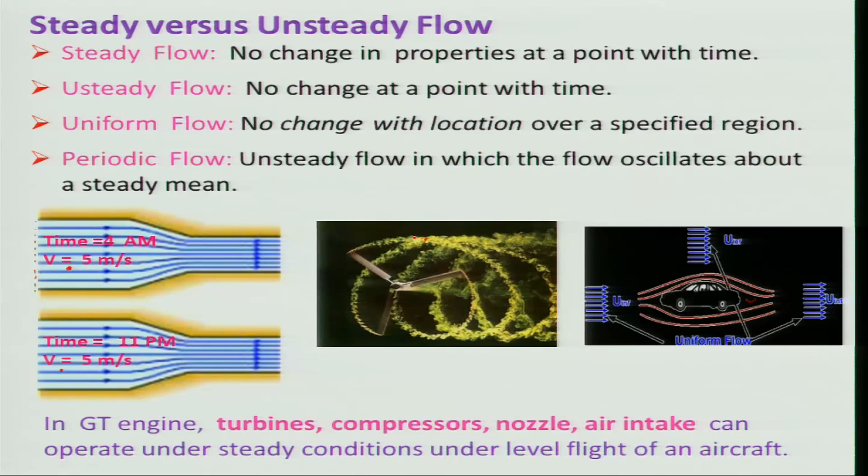So that way it will be periodic in nature, which is useful particularly when analyzing turbo machinery. In gas turbine engines, components like turbines, compressors, nozzles, air intakes can be considered to operate under steady state condition, particularly under level flight of an aircraft. Suppose you are flight leveling, not like a fighter aircraft where you need to change the thrust as well - then the condition inside the gas turbine will be changing. So therefore, under certain situations like level flight, one can consider it to be steady flow, and we will be using this most of the time unless otherwise stated.

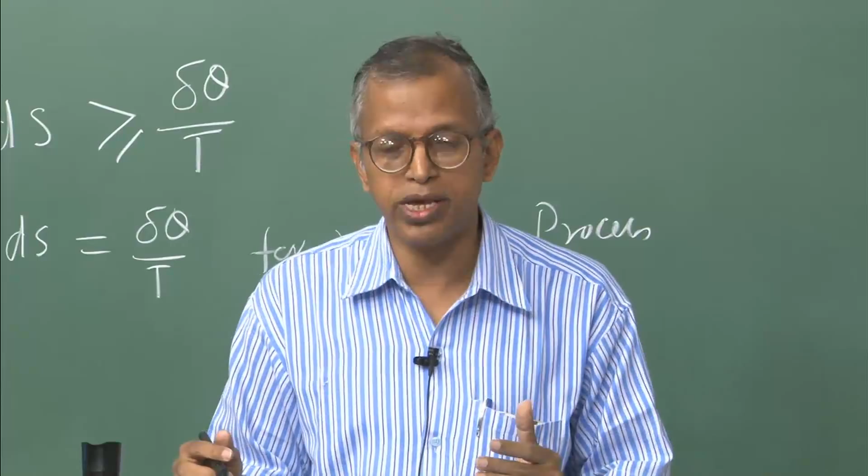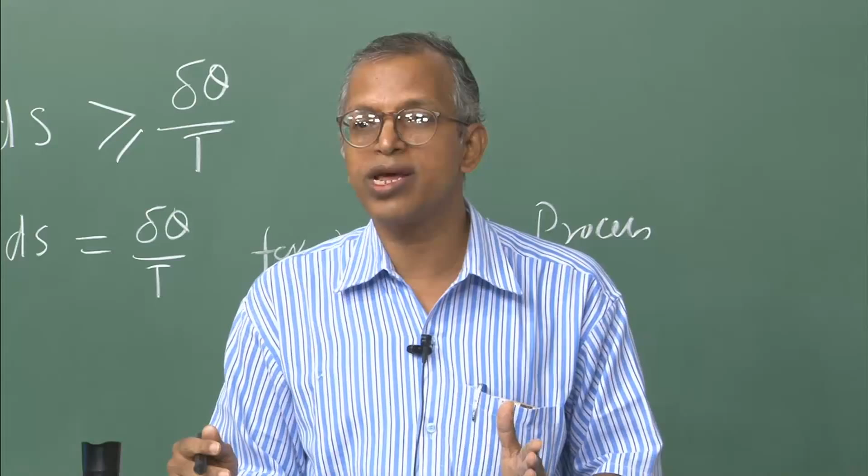So with this we will stop. Before that, let us summarize what we have learnt. Can anybody tell me what are the things we have discussed till now?

Let me tell you. We started a discussion about fluid mechanics, defining how it is different from solids, and then we talked about Newtonian fluid and how it is different from non-Newtonian fluid. Then we discussed the continuum concept and how it is useful, and how it is differentiated from other flows by a number known as Knudsen number. Then we moved into laminar and turbulent flows, looked at the effect of viscosity, and apart from viscous effects or shear stress being generated, it can also produce drag. We talked about total drag being the sum of skin friction drag and pressure drag. Then we talked about aerodynamic heating effects, and then we looked at steady and unsteady flow.

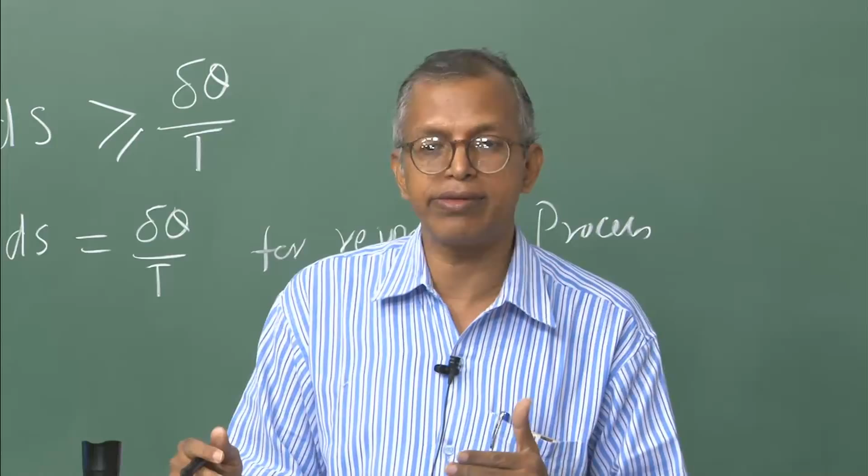In the next class, we will discuss various aspects of fluid mechanics, then we will look at governing equations, then move to compressible flow, which is quite important for analyzing propulsive devices. Is there any other question? You can ask me. Okay, thank you very much.